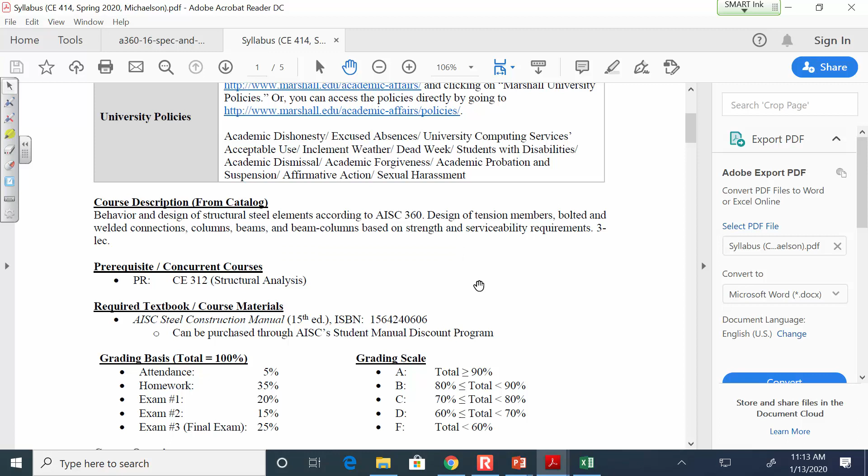Let me pull up the syllabus real quick. Most of what I just said is in here. Like I said, there is no textbook, but there is the manual, and you do need that. Grade distribution, you all know the drill on all of this. Here's what I wanted to pull up. So Wednesday, January 29th, I will not be here. I have a research trip that I got to go to, so that class will be canceled for sure that day. First exam will be Wednesday, February 19th, and the second exam will be Wednesday, March 18th, which is right before spring break.

And I've got the schedule set up in here to where we'll have a makeup day here, and if we don't need to use that lecture, we won't. You'll get the Friday before spring break off. I'll go ahead and tell you that is probably not going to be the case in concrete design. We have homework due that day, and I got to see where we get from a lecture standpoint. There is a chance that we can cancel that day, but it's not high. I'm just being honest with you. So just something to keep in mind. But in here, we're probably definitely going to do that.

When we come back from spring break, I'm going to have April 3rd canceled because that's the Virginias conference, the canoe and the bridge. So I'll be gone then. And then we have our final exam on April 28th. For finals week, we have the concrete final Monday, the steel final Tuesday. So we get to get those done like a Band-Aid. Okay? Like I said, the final homework assignments for both classes are due that same day, but other than that, everything's staggered. So far, so good?

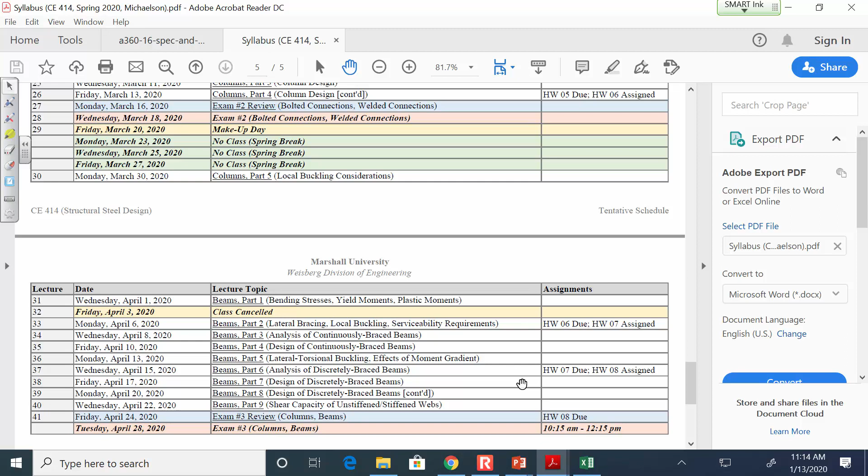All right. Let me pull up Blackboard real quick. So I have the Blackboard pages pulled up for both classes. So this is steel design, this is concrete design. When you go to course content for steel design, you'll find the syllabus here.

The old homework assignments, I'll post solutions to the homeworks as we do them in this folder. So if you had me for class before, that's typically what I do. For lecture notes and supplements, right now I've got enough at least to get us through the first week, and the same thing's true in concrete design. So for instance, if you go to concrete design, go to course content, lecture notes, same story. I am going to post a few design aids and supplements in here as the semester progresses.

I want to show you what I've got here, these AISC resources. So let me just sort of back up. This manual is written by the American Institute of Steel Construction, AISC. Okay? They are basically the governing body that designs and writes the specifications for how to design steel structures in the United States. That's what they are. The American Concrete Institute is a similar body for concrete structures. We talked about that in concrete design in the last class session.

But I will go ahead and tell you that I much more prefer, as an educator, working with AISC, because they do a really good job of making their materials available for free, okay? Not all of them, but some of them. For example, while the manual is not free, there are two things that are, okay? The first is this PDF. See where it says A360-16 spec and commentary? Okay, let me show you what that is.

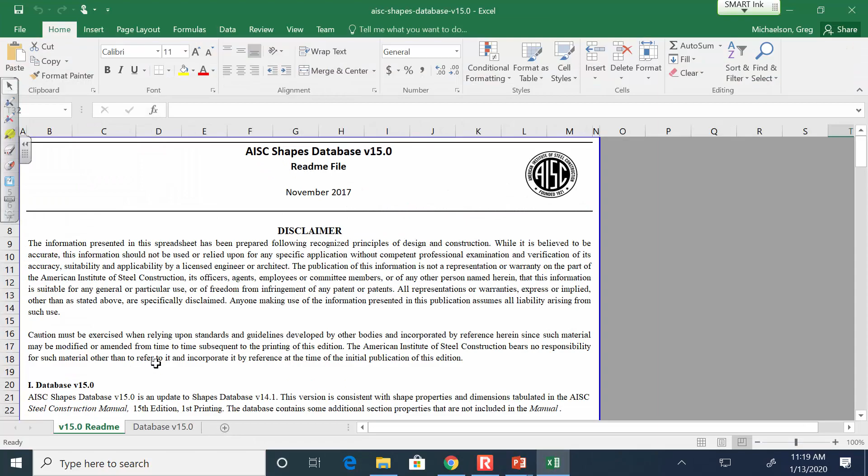See where it says AISC Shapes Database? You're going to think this is silly, but let me explain what this is. So when you download that, you're going to get a disclaimer, and then you're going to get this. Let me zoom out a bit, sort of. Yeah, it's pretty big, right? This is the dimensions and details for every steel shape available in the United States, okay?

We're going to talk about how to interpret this data and how to understand it throughout the semester, but this basically lists all the dimensions and properties and so on and so forth. Now, this information is actually in the very front of the manual. If you open it up to the first few tables, you'll see these sections on WTs and angles and HPs and W shapes and so on. It's all here. This is just taking that data and dumping it into Excel, okay?

And so if you're looking at a given shape, for example, let's make one up. Let's look at the W16x40. So the W16x40 weighs 40 pounds per foot. It has a cross-sectional area of 11.8 square inches. It's 16 inches deep. It has a flange width of 7 inches, a web thickness of 0.305 inches, a flange thickness of 0.505 inches. All of that information's in here as well, but this is all just in Excel. So if you want to download that and have it on your laptops for when you're doing homeworks, that's fine too. They put that on the website and it's available for free.

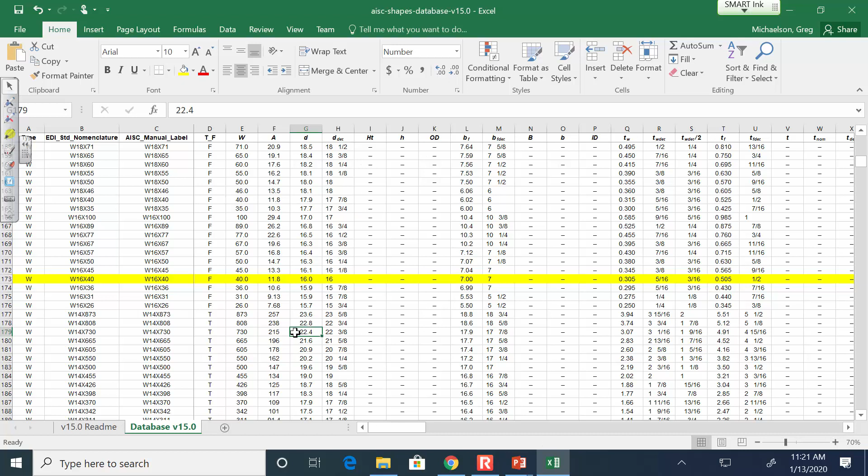I also recommend that you all sign up for an AISC student membership. It's free, and they have oodles and oodles of design guides that you could download for free. And if you had to pay for those things, it's like $1,000. So it's like $1,000 of free stuff. I like free. I don't know about you, but that's okay with me. But I would consider that. Plus, being an AISC student member looks good on a resume. All that jazz. Okay.

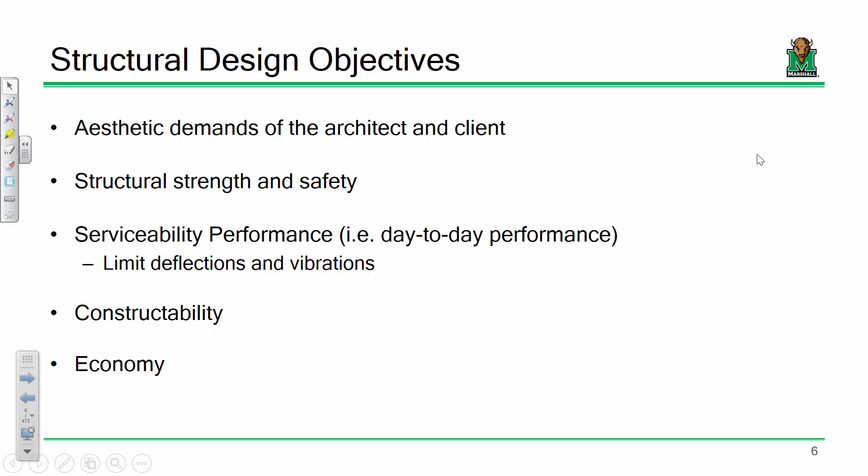Also, in the end, it's got to be economical. You can't be designing a structure with super massive beams, super thick flanges, and so on and so forth, that's going to cost an arm and a leg. It has to be effective from an economical standpoint as well. There's a famous quote from a guy named Hardy Cross that said, strength is essential but otherwise unimportant. In other words, once you've met the fact that the structure is safe and isn't going to kill people, there's a whole lot of other stuff that we have to consider as well.

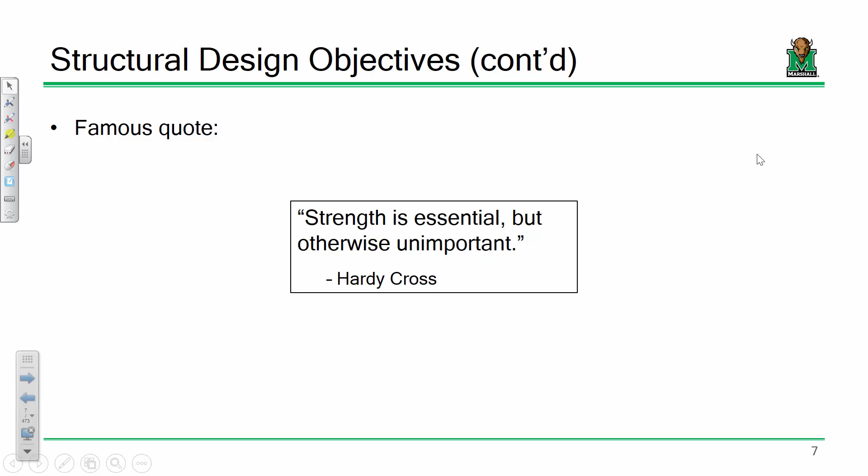Hardy Cross is a very famous structural engineer. He came up with some very refined analytical tools that were the mainstay until a guy named Bill Gates came around and said we can do this a lot better and develop the means to integrate some computational tools into what we do. Before Bill Gates, we would have been talking about Hardy Cross a lot more.

So what's your role as a structural engineer in the project process? Well, let's talk about this from phases. So the first step is the definition of the project, the planning. Geico Insurance wants to build a new corporate headquarters, or whatever company, whatever developer wants to build a project. So what's the role of the structural engineer? Well, they're trying to determine the function of the building, the general layout, the design criteria, just trying to figure out what's going on. I mean, if you're designing an office building versus designing, let's say, a hotel, the design from a structural engineer standpoint gets different right then on day one.

For example, if you're designing a hotel, typically with hotel designs, you know where the hallways are and you know where the rooms are, okay? Like the hallways are here and the rooms are there. And that's important because there are different loads that we apply on the hallways than we do on the rooms. There's typically more people at any average time in the hallways than there are in the rooms, which is why hallways tend to have like 80, 90 PSF loads and the rooms only have 50 PSF loads, because there's more people there and they need to be able to handle that in the instance of emergencies, fires, so on and so forth. So we have heavier loads in the hallways.

Whereas if you're designing a commercial office building, it's a little different. How many of you have ever been in a large office building, one of those commercial spaces where people can rent out by the square foot and put whatever in there? If you're the developer, you want your tenants to be able to arrange that floor space however they want. Like let's say here's your building, and I got a dentist's office that wants this space, I got an accountant that wants this space over here, I got a law firm that wants this space, the Social Security office wants this space, so on and so forth. As the developer, you want that building to be as versatile as possible.

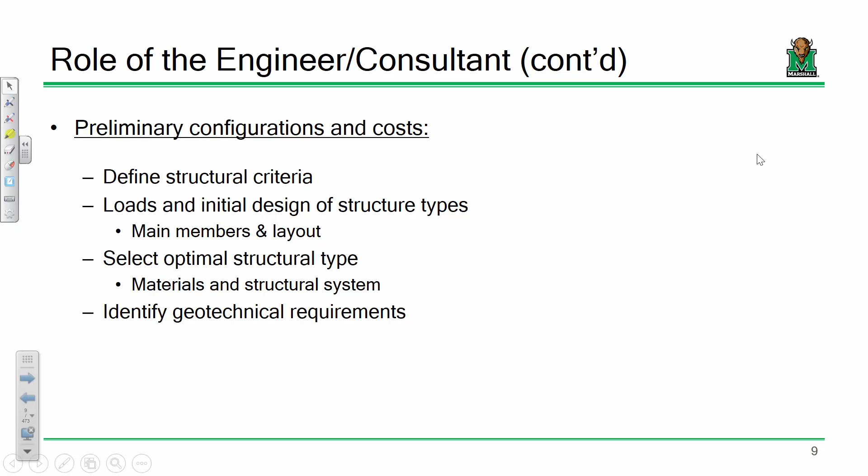Selecting the optimal structure type. Does it need to be a steel building? Does it need to be a reinforced concrete building? Also, buildings tend to get built on the ground, so we need to understand the geotech requirements. Probably going to schedule some boring logs, get some soil data, try and get a bearing capacity, get foundation design, so on and so forth. Then we start tweaking and refining it, getting our final design done, making our final analysis of the loads, evaluating and optimizing what we're doing.

And once you've got a final design, then we can start doing cost estimates. We've got 40 W10x49s, and each W10x49 is going to cost $2,000 once it's fabricated and drilled, and so on. So that's how much that's going to be. We need 6,400 bolts for the project, or whatever makes sense. Then it's time to draw that up. We need to get some structural drawings, some construction specs, get the bid documents ready so that some contractor can go bid and build the thing.

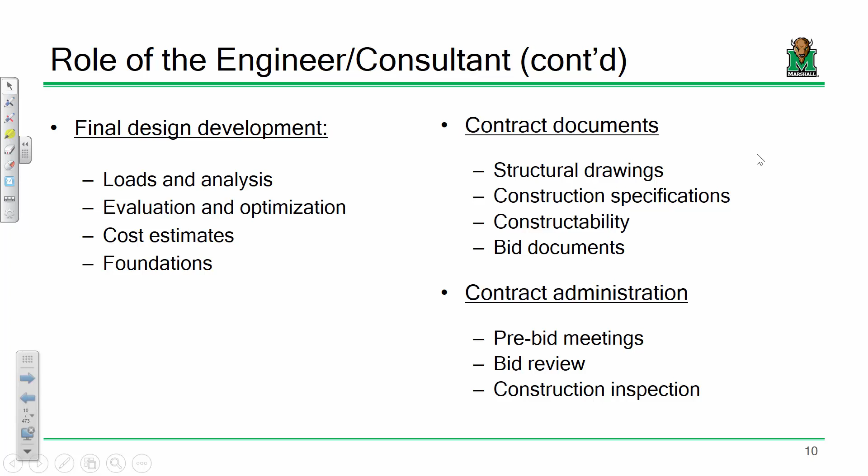You might be involved in contract administration. Once you award that thing, you actually have to review its construction, review the bids, so on and so forth. What I have on this slide is something I really want you to commit not really to memory, but to heart. And I don't care if we're talking about structural engineering or geotechnical engineering or whatever. This is something I really want you to keep in mind throughout your career.

What I have over here on the left is the ability to influence the cost of a project over time. When you're in the beginning phases, the conceptual planning phases, the design phases, you have a really big ability to influence the cost of that project. Let's say we're in this room right now and we want to build a new corporate headquarters for Geico. We could have a discussion today as to whether we want to build a steel structure or a concrete structure. And that discussion could have a significant influence on the cost of that project at the end. That matters, okay?

By the time that you're fabricating the structure and erecting it, you're not really going to have that much of an ability to affect the cost because the decisions are made. But what about the flip side? What about the cost of the change over time? Us having a discussion about whether that Geico headquarters needs to be a steel building or a concrete building doesn't cost any money, right?

But what if you're fabricating the structure and you go, whoops, those W10 by 49s needed to be W10 by 53s. That's going to cost some money. That's going to cost a lot of cash, okay? So when you're at the tail end of a project and you're needing to change things, that costs a lot of money.

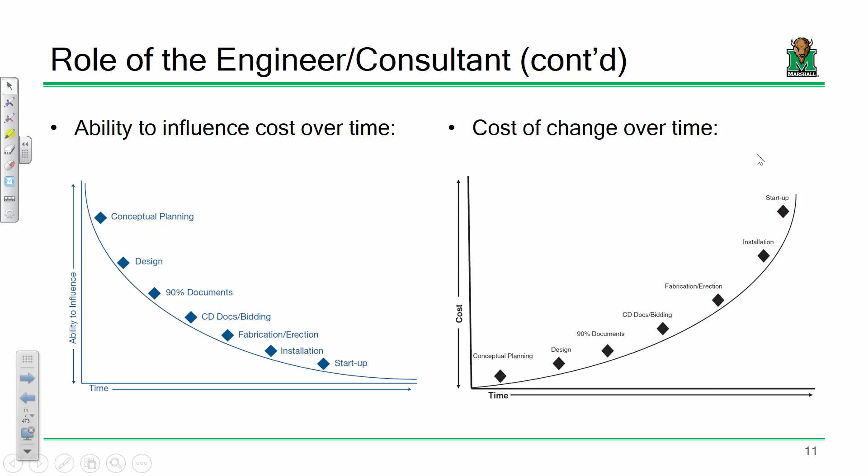And so I just want you to commit this concept to your head, the idea that at the beginning of the project, decisions are cheap, but they also matter, okay? And that near the end of the project, if you're going to change something, it's going to cost, okay? And it doesn't matter if we're talking about structural engineering or transportation engineering. I just think this is important for you to understand as an engineer, okay? Does that make sense? Any questions on that?

All right. I'm going to really quickly breeze through this. We talked about design philosophies during our last lecture, and if you've already had me for concrete design, you probably remembered this. So one of our first philosophies is allowable stress design. The idea is that if I break this table and it fails at 800 pounds, what I might use is a factor of safety of 2 and say, no, you can only put 400 pounds on this before it fails.

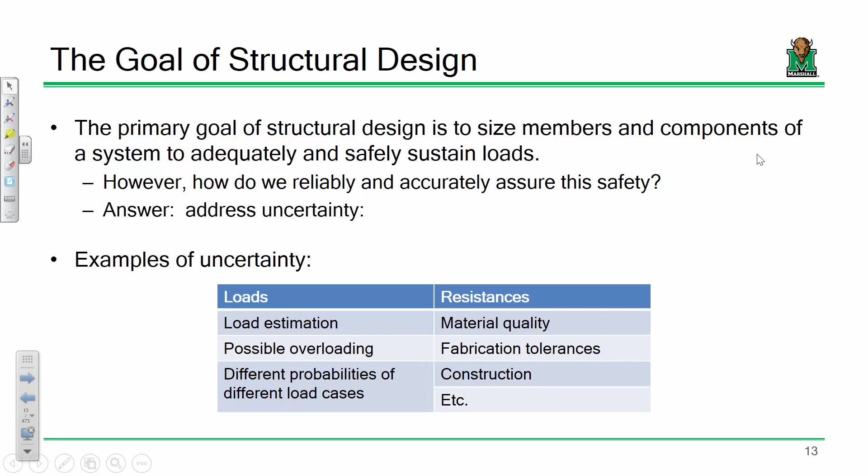And that's great, it's a simple philosophy, but it doesn't take into account uncertainty. There are oodles of uncertainties associated with the material quality, how this thing was fabricated, how it was put together, how it was constructed. There are uncertainties with loads, snow loads and dead loads and live loads don't behave the same. They have different statistical uncertainties. And so what we do is we handle that through probability-based methods. So an allowable stress design method just takes the quantity and divides it by a factor of safety. We are not going to do that in here.

However, let me be clear, factors of safety still get used appropriately, I might add, in certain areas of engineering. For us, I would say geotechnical engineering is the one where factors of safety are still appropriate because soil behavior is so variable. You could get a boring here, and literally go right here and get another boring and get completely different behaviors. Soil's just weird. It doesn't behave as easily as you would think. It's so variable. And so in that world, because the variability is so high, it's screw it, let's just go with a factor of safety of 3. And I don't think there's anything wrong with that. It's just something to keep in mind.

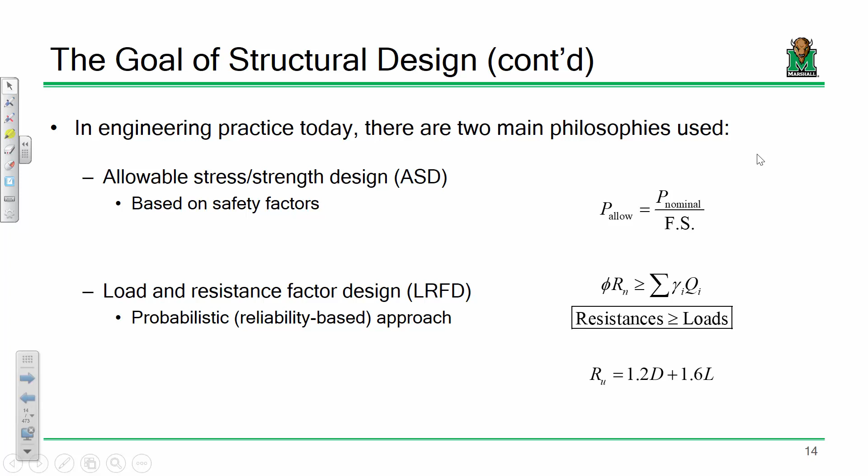Now, load and resistance factor design is what we're going to use. So if you were in concrete design, you probably remember this. If you're in it now, you're going to become familiar with these very, very soon. The concept is that we factor not just our loads, but our resistances. A very common load combination that we'll use is 1.2 times the dead plus 1.6 times the live. You don't need to commit that to memory now. We'll use it, believe me, more than enough that it'll become stuck in your head.

The reason why we use a probability-based approach is because what we're trying to do is look at the structure from a probability standpoint, from a normal distribution. If you recognize, the normal distribution goes on forever. And so if it goes on forever and you classify structural behavior as behaving this way, the resistance of a structure and its loads, there are some instances where the loads would be bigger than the resistance and the structure is unsafe. So the idea is, let's not try and design structures that are perfectly safe, because there is no structure that's perfectly safe. Instead, let's try and manage that probability of failure by developing load combinations that keep this small and uniform, hence where this is coming from.

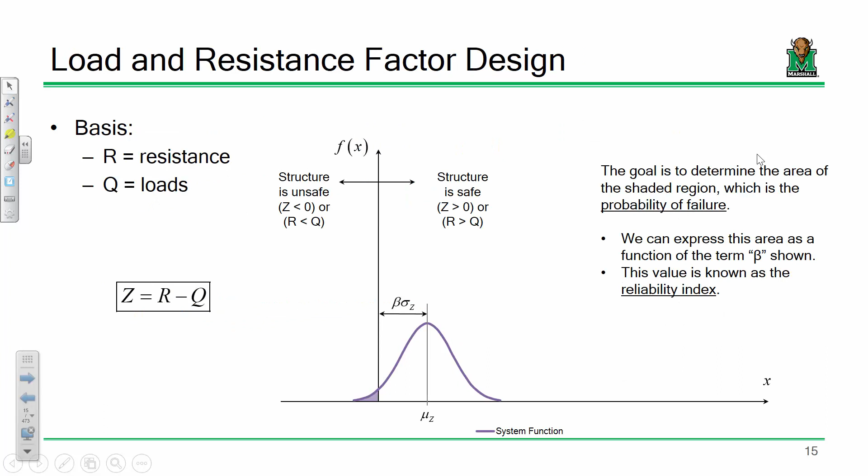So here are some of our load combos that we use in structural engineering. These are the same ones from steel design and concrete design.

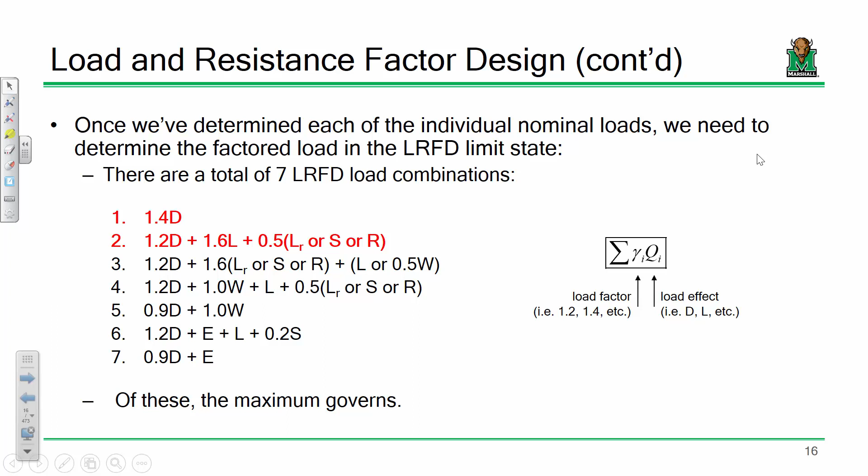Right? There's no wind or earthquake load inside the building, and we'll discuss why. So I propose to you that for interior elements, you can take the wind and earthquake load equal to 0. So the only thing you have to deal with is dead and live when you're designing interior elements, and that's either that or that. Because set everything else equal to 0, and these are the only ones that are going to matter. Like I said, we will use those pretty regularly, and you'll see where those are applied. You don't really need to memorize them now. Don't worry, you'll pick them up later.

Any questions so far? Okay. Here's what we're going to do. In this course, I tend to focus on lateral load events. So there are 2 types of loads that act laterally on structures. We have 5 load events that we typically consider in structural engineering. 3 of them act up and down. That's dead load, live load, and what? Everybody remembers from our last lecture? What acts up and down? Dead, live, and snow. Snow acts up and down. Rain acts up and down too, but typically rain you can drain off. And so rain doesn't stay on the building like snow does.

As for loads that act left to right, there's 2 that we have to consider, and that's wind and earthquakes, seismic. In here, I like to focus on the lateral loads, and in concrete design, I like to focus on the gravity loads. So between the 2 classes, you sort of get a general understanding of everything. Now, I will preface this by saying that lateral loads are complicated. They can really get tricky. And lateral load design typically gets harder as the building gets taller. Like, it's easier to design this building for lateral loads than it is Smith. Because as buildings get taller, the loads increase. In fact, that's what makes tall building design hard, is the lateral events.